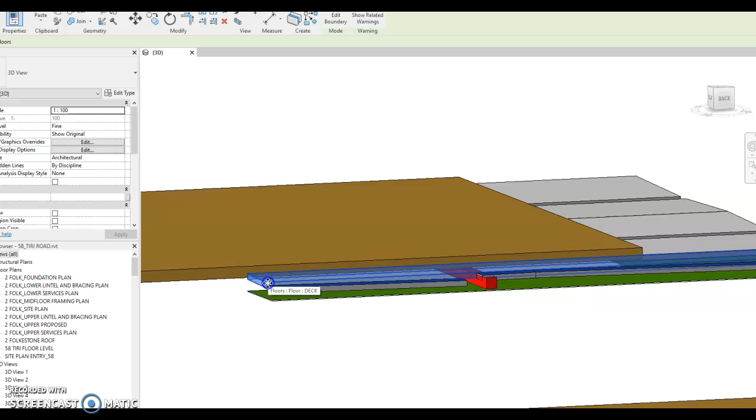Firstly, what I did was this part of the deck is still 135 down from the floor. However, it has a 1.5 degree fall flowing this way, not the fall which is shown on the drawings. And that's basically to try and lift this edge up a bit to clear the steel beam.

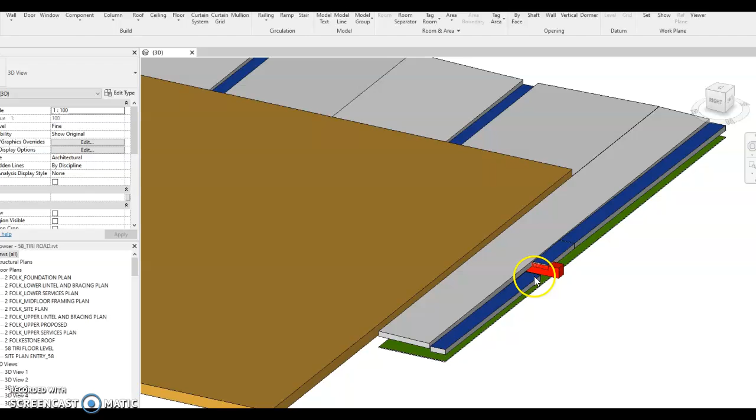This internal gutter is a 50mm step down as per the drawings with a 1 to 100 fall towards the outlet. Now getting to where the steel beam is, basically this is a new high point that's been created within the gutter. It flows 1 to 100 going towards the left, and then you've got a gutter on the other side flowing to the right at 1 to 100.

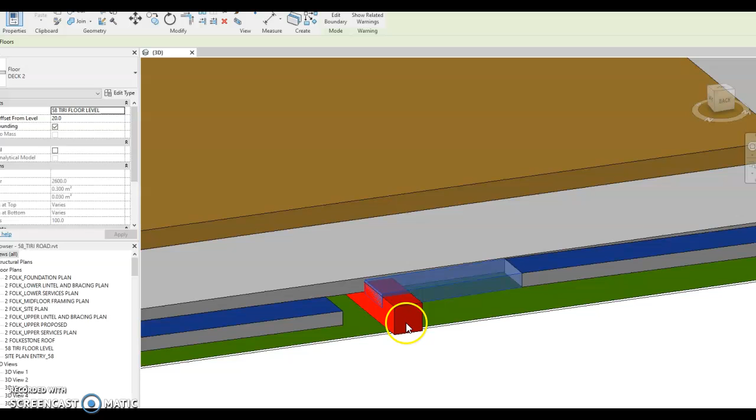Now the ply only clears by 20mm, well, the thickness of the ply, but that's not a problem because we can have timber on the left hand side and on the right hand side, so it's merely just bridging the ply. So that all actually works.

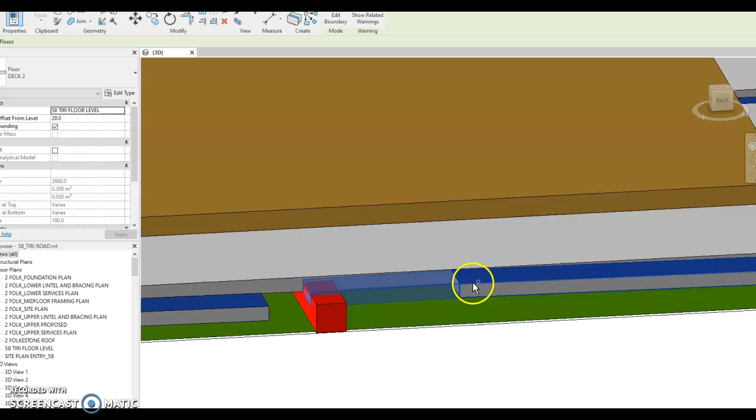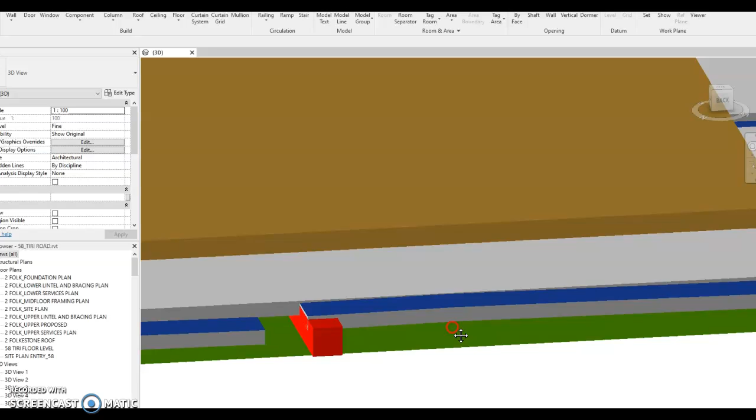However, the only issue is where these two high points meet. It's about 5mm lower than the edge of the deck coming down on this fall. So it is still a drop down, but you just don't have that 50mm. And whether that's a requirement or not, that's the only issue, is that part.

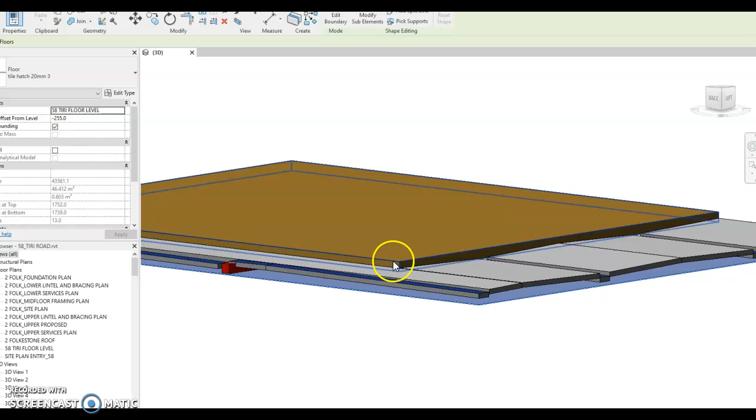This gutter falls 1 to 100 going this way, so there's no issues there. Quite a long fall, but that's okay. The soffit level, which I've set as 2420 from the floor below, or there is another measurement on the plan which is, I think from memory, 440 something from this floor level going down. So that's the soffit, and none of it fouls. There's actually quite a lot of room in there, even with all the gutters plotted.

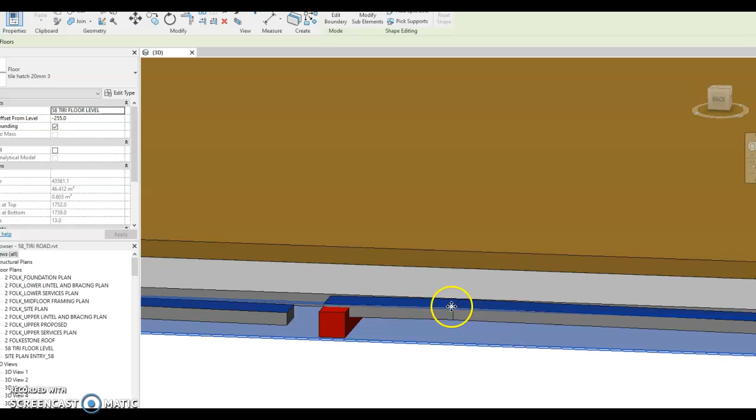So yeah, it's just a question of whether that's going to comply. That's sort of where these two meet and the relationship between that ridge and the deck.

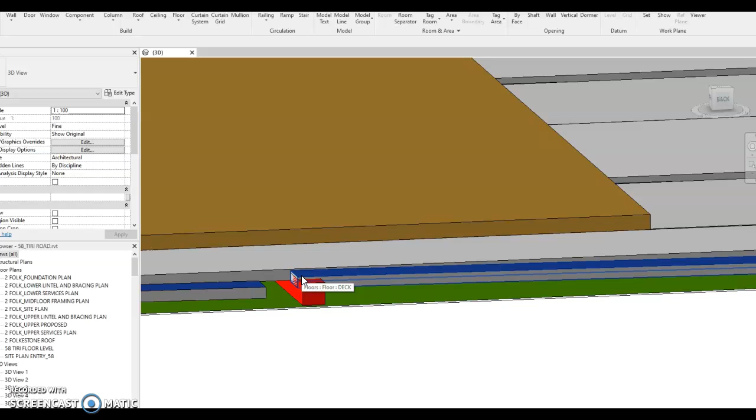Now, as an option 2, rather than breaking the gutter, I did model it up just to see what it looks like. Basically, with no break in the gutter, 20mm above the steel beam being the high point, flowing all the way down to this end, where the outlet is, still plenty of room in the soffit, and it gives us about 10mm at that end drop down, which I just thought for buildability wise, it's probably less.

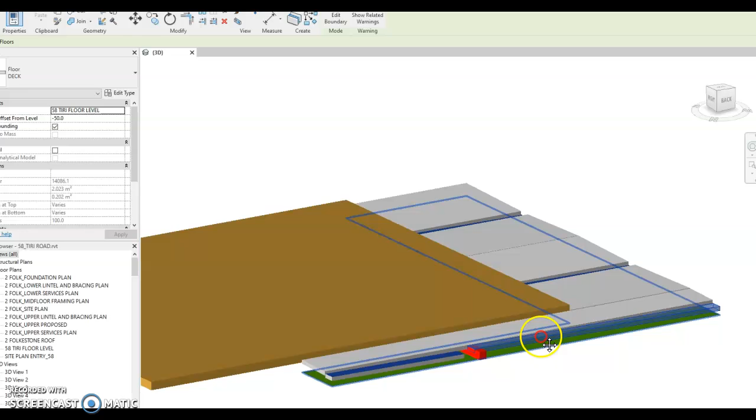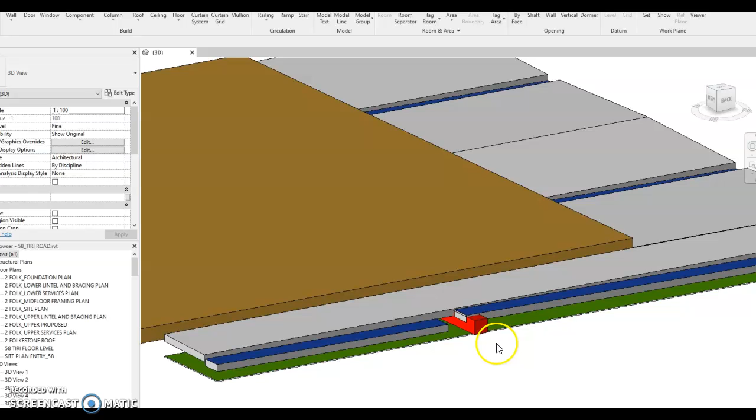There's only one gutter falling one way rather than two gutters, and we probably get a better outcome where this deck falls onto the gutter. So that's about it. So still the 135 set down, the 50mm drop into the gutter. All the gutters comply. This flies over the steel beam, so it all works. So hopefully we can look at either option 1 or option 2.